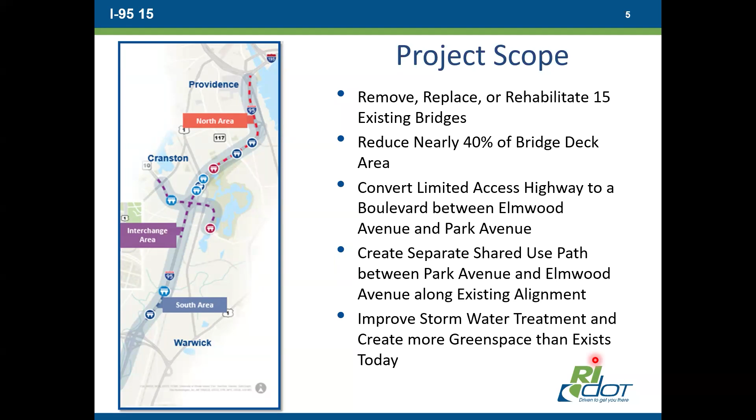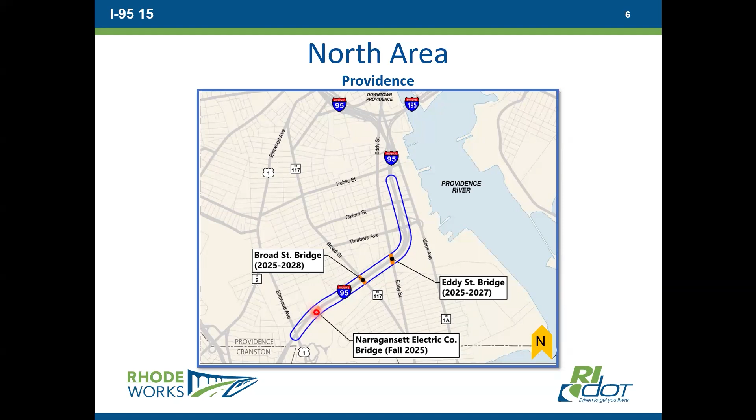The northern area of the project is located in the city of Providence. Two bridges will be replaced along this section of Interstate 95: the bridge that carries Eddy Street over I-95, and the bridge that carries Broad Street over I-95. Replacement of these two bridges will begin this year and will take approximately two to three years to complete. A third bridge, which carries I-95 over abandoned railroad tracks at the Narragansett Electric property, will be fully removed and filled in later this fall.

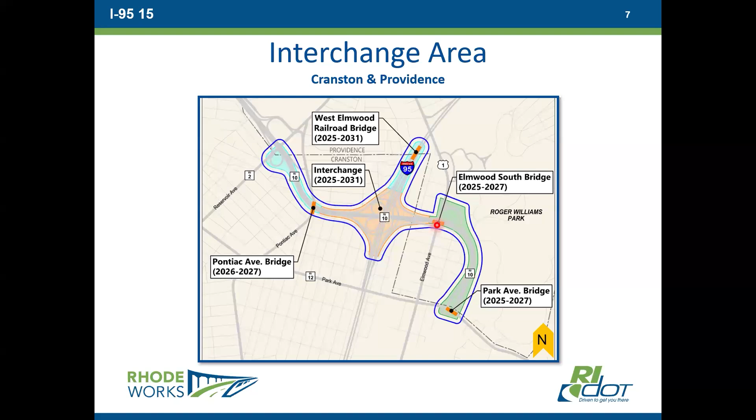The next section of the project is what we call the interchange area. This area of the project will undergo significant changes. Located within the cities of Providence and Cranston, work on this area includes the bridge that carries I-95 over the Amtrak railroad tracks. Shown on the slide is the West Elmwood Railroad Bridge, the I-95 Route 10 interchange, as well as Route 10 from Pontiac Avenue to Park Avenue. RIDOT will also be replacing the bridge that carries Route 10 over Elmwood Avenue and eliminating the bridge that carries Park Avenue over Route 10. We will talk more about these two areas later.

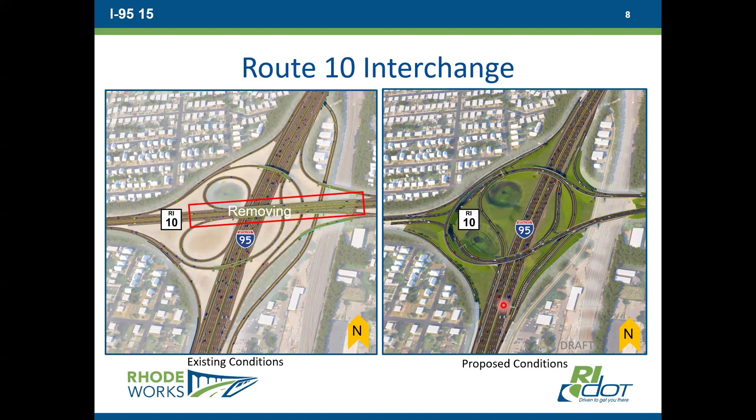A significant change from what the public sees now begins at the intersection of I-95 and Route 10 and continues to Park Avenue. The bridge that carries Route 10 over Interstate 95, Wellington Avenue, and the railroad tracks will be removed. All traffic movements that currently exist will be absorbed into the loop ramps shown on the right side of the screen. This design allows RIDOT to introduce a new traffic movement that does not currently exist today between I-95 northbound and Route 10 southbound, while reducing the amount of bridge deck area that RIDOT needs to construct and maintain.

Moving to the east, RIDOT will be taking out the existing off-ramp that connects Route 10 southbound to Elmwood Avenue. The Route 10 southbound traffic that uses this ramp will now access Elmwood Avenue by taking a left turn at a new traffic light on Route 10. There will also be a new off-ramp connecting Route 10 southbound and Elmwood Avenue. After removal, the area of the existing ramp will be landscaped to create additional green space.

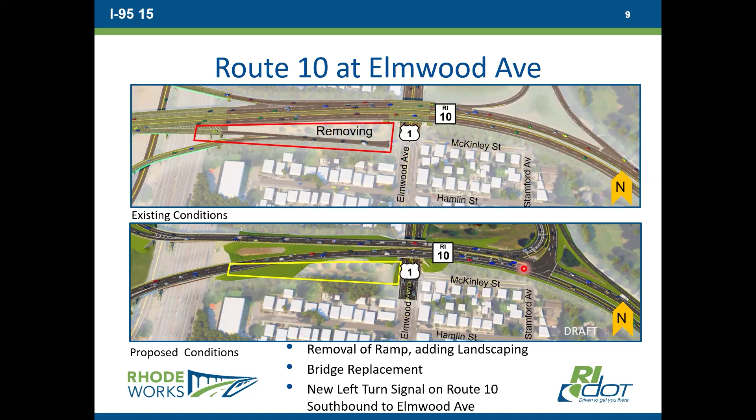The new configuration between I-95 and Elmwood Avenue is shown on the screen, showing the proposed conditions. The interchange has been reconfigured, the existing ramp to Elmwood Avenue from Route 10 southbound has been removed, and a new left turn signal on Route 10 southbound to the Elmwood Avenue off-ramp has been installed. This new configuration maintains all existing traffic movement, introduces a new traffic movement, reduces bridge deck area, and eliminates a traffic signal on Elmwood Avenue.

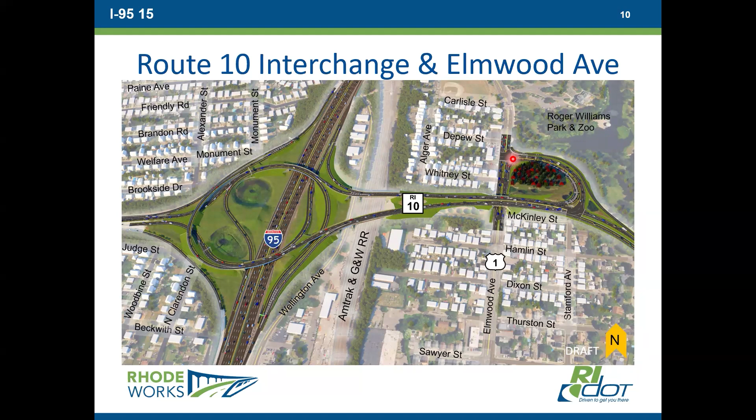The area between Route 10 and the Elmwood Avenue ramp was cleared by the contractor earlier this spring. The trees that were removed will be replanted. Some of the area will be used as staging for the next couple of years as the contractor replaces the bridge that carries Route 10 over Elmwood Avenue. Some of the new landscaping will be planted in 2025, and the final landscaping will be installed upon completion of the bridge in 2027. This area will also be used to treat stormwater runoff.

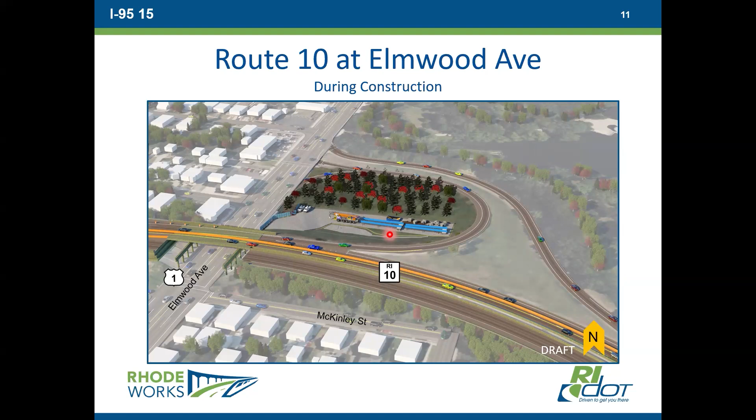So that will be trees and green space in that area, correct? Yes.

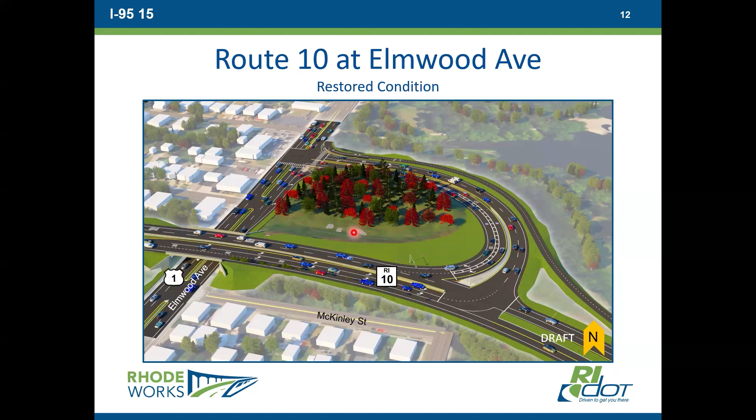The southern end of Route 10 is the crown jewel of this project and will undergo major enhancements for the public and the environment. Shown here in blue, the limited access highway will be replaced by a boulevard type roadway on the footprint of the existing Route 10 southbound. We will remove the bridge that carries Park Avenue over Route 10, and a new at-grade intersection will be constructed.

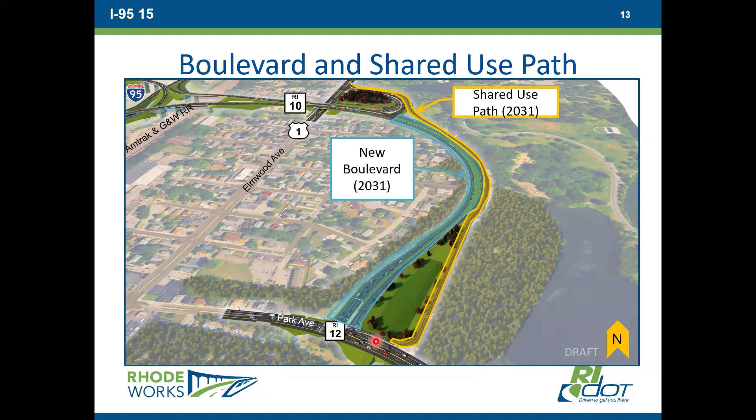A new shared use path, shown here in yellow, will be built between Park Avenue and Elmwood Avenue. The shared use path for bikes and pedestrians will be separated from vehicular traffic for its entire length of approximately 0.6 of a mile. Some of the existing pavement will be removed to create additional green space and stormwater treatment. Landscaping will also be installed in this area, although the final landscape design is still under development.

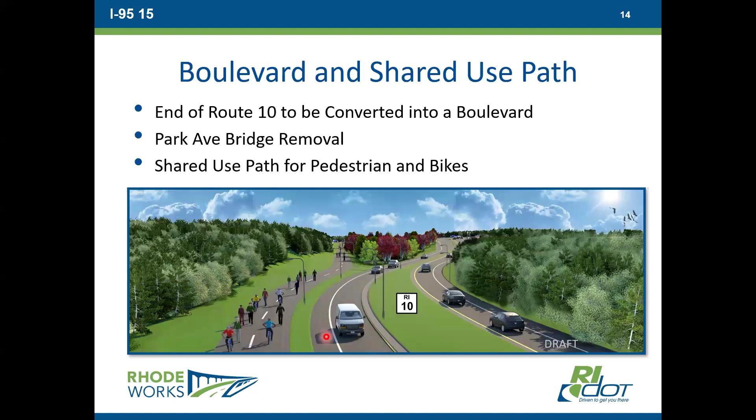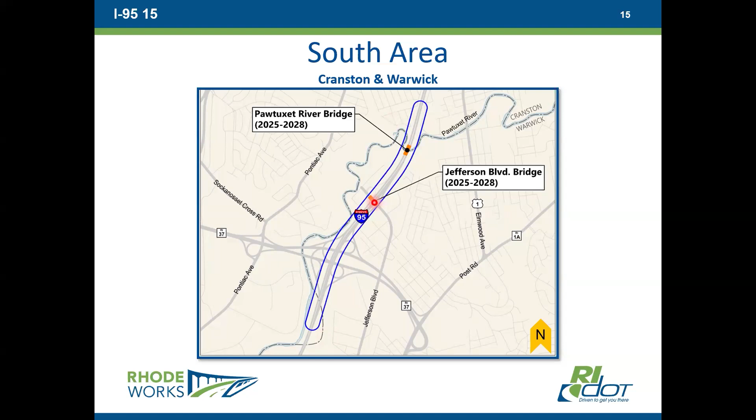The southern area of the project is located within the cities of Cranston and Warwick. There are 2 bridges that will be replaced in this area: the bridge that carries I-95 over the Pawtuxet River, and the bridge that carries I-95 over Jefferson Boulevard. Work will begin on these 2 bridges in 2025 and is expected to take 3 years to complete.

As the contractor works to rebuild these bridges, there will be traffic impacts felt by commuters and residents. Across the entire project, all lanes on Interstate 95 will be maintained during commuting hours, with intermittent lane closures at night. There will also be 2 weekends this fall in which Interstate 95 will be reduced to 2 lanes in each direction, where the contractor removes the Narragansett Electric Bridge. Motorists can expect delays similar to what they experienced in 2024 when we replaced the I-95 bridge over Elmwood Avenue on accelerated weekends.

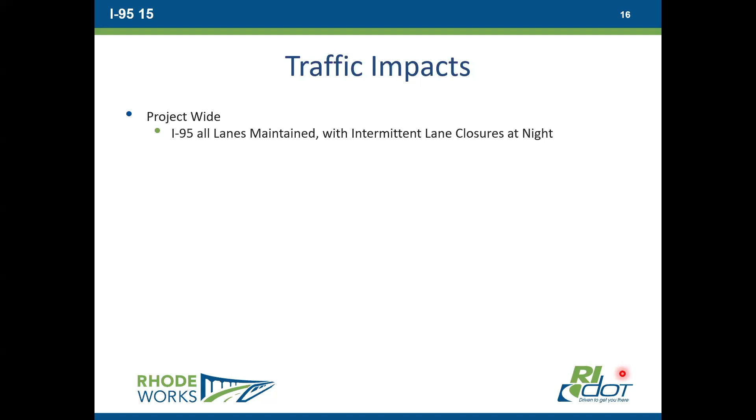In the north area of the project, detours will be in place beginning this weekend as we detour Eddy Street southbound. We'll cover these detours more in depth in a minute.

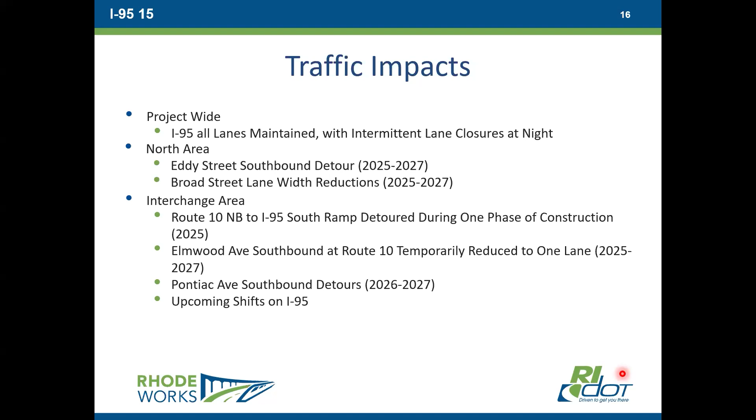In the interchange area, the Route 10 northbound to I-95 southbound ramp will be detoured during some of the construction later this year. Elmwood Avenue southbound will be reduced from 2 lanes to 1, and lanes will be narrowed in both directions. Beginning in 2026, Pontiac Avenue southbound will be detoured for repairs to the Pontiac Avenue Bridge.

There will also be an upcoming lane width reduction and shifts on I-95 under Route 10 beginning this Friday night. Additional lane width reductions and shifts on I-95 will be announced by RIDOT in the future and posted on our website and project page.

In the southern area of the project, Jefferson Boulevard will be permanently reduced to 1 lane in each direction for the short distance under Interstate 95. RIDOT will also close the on-ramp to I-95 south from Jefferson Boulevard from 2026 to 2028, and a detour will be in place.

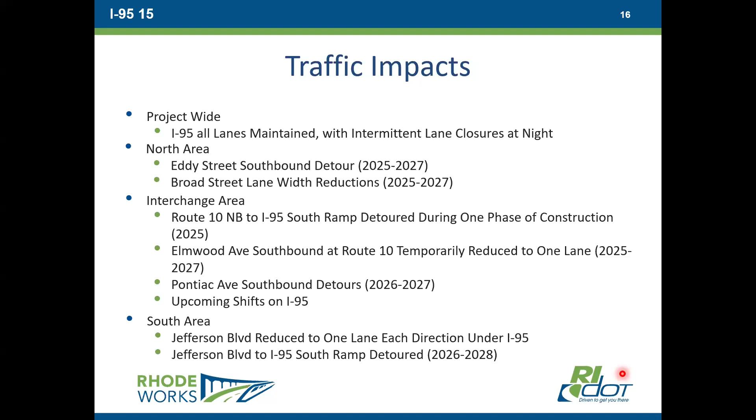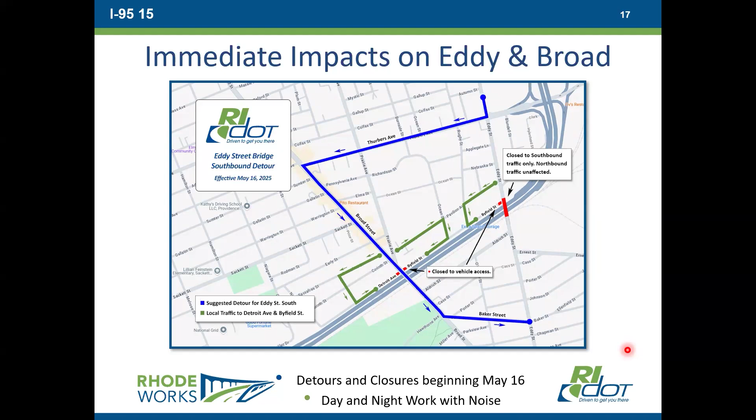As the contractor works on this project, there will be construction impacts we want to let you know about. Demolition work for any bridge over live traffic needs to be done at night. Residents can expect demolition noise and light during the bridge demolition. This work is expected to take place between 9 p.m. and 5 a.m. In addition, the contractor will have to clear existing trees and vegetation in overgrown areas along ramps and bridges to construct the project.

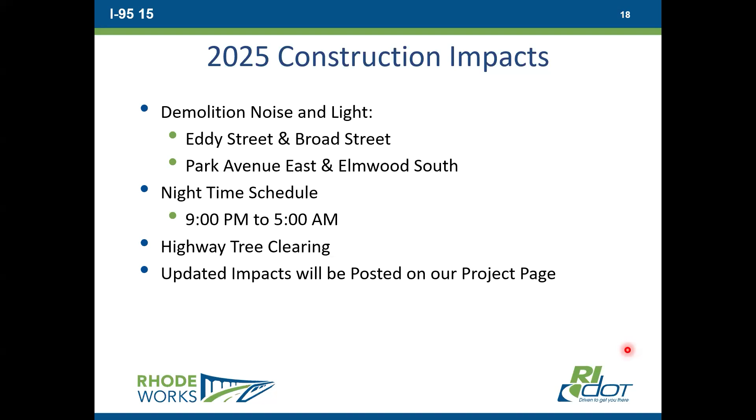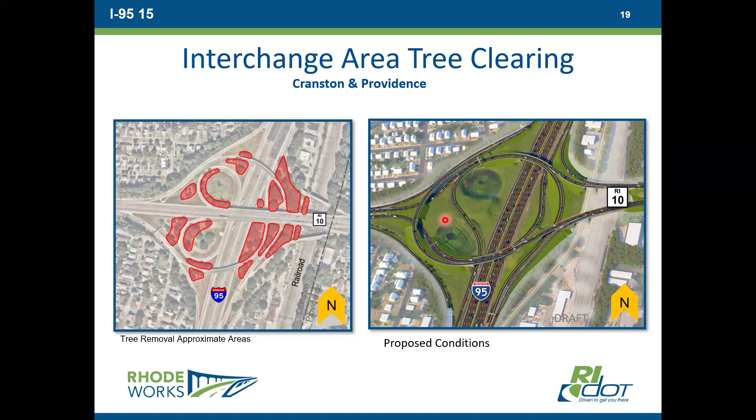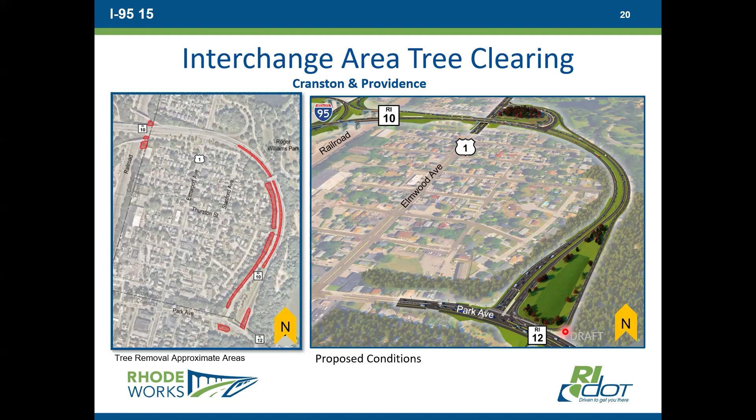RIDOT will have converted the limited access highway on Route 10 between Elmwood Avenue and Park Avenue into a boulevard, created a shared use path between Park Avenue and Elmwood Avenue, and created additional green space and stormwater treatment. Upon completion of the project, there'll be more green space than exists today.

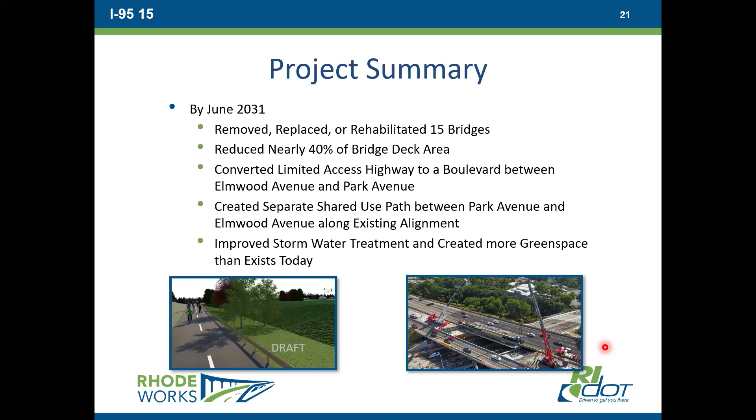So next steps, we have an example here of our project page that has been put on our website for this project, the I-95 15. We will again send emails to everyone with links to this that you can share.